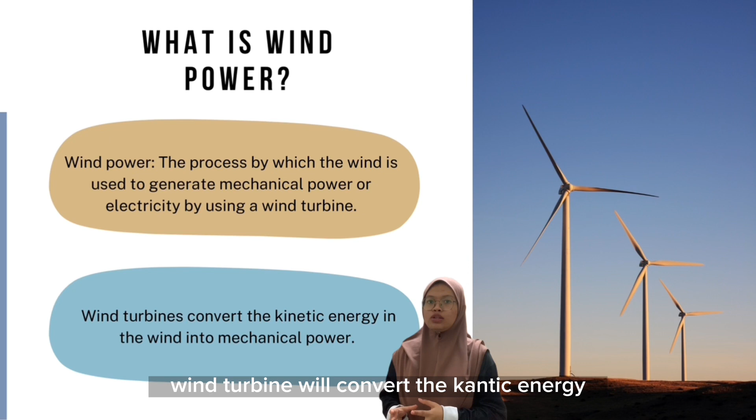Firstly, I will explain about the definition of wind power. What is wind power? Wind power is the process by which wind is used to generate mechanical power or electricity by using a wind turbine. The wind turbine will convert the kinetic energy in the wind into mechanical power.

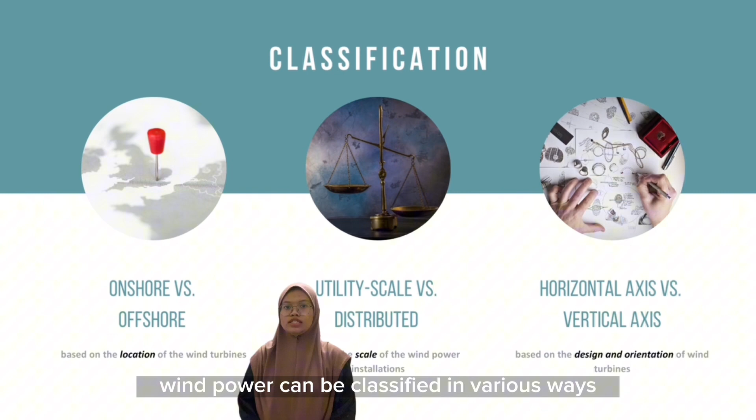Okay, we move to the classification of wind power. Wind power can be classified in various ways based on location, scale, turbine design, capacity, and connection. Understanding this classification helps us better appreciate the diversity and versatility of wind power as a renewable energy.

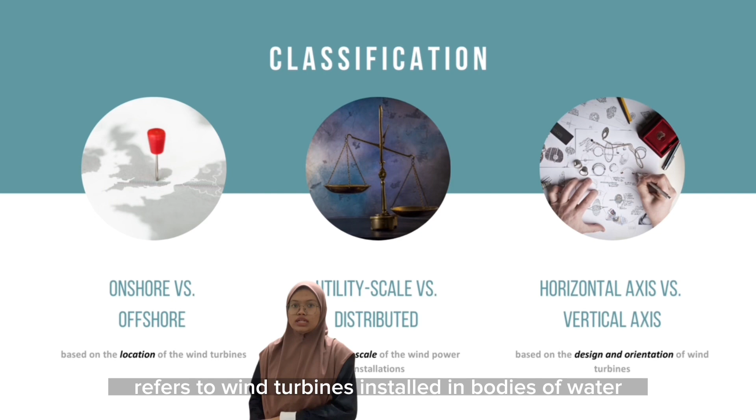The first classification is based on the location of the wind turbines. We have onshore wind power and offshore wind power. Onshore wind power refers to wind turbines installed on land, typically in open areas, hills, or mountains. Offshore wind power, on the other hand, refers to wind turbines installed in bodies of water, usually in coastal areas or in large bodies of water such as lakes or seas.

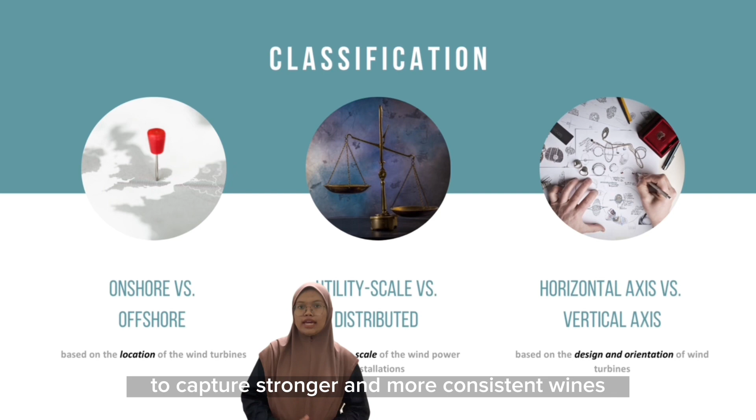Offshore wind farms are often built further out to sea to capture stronger and more consistent winds.

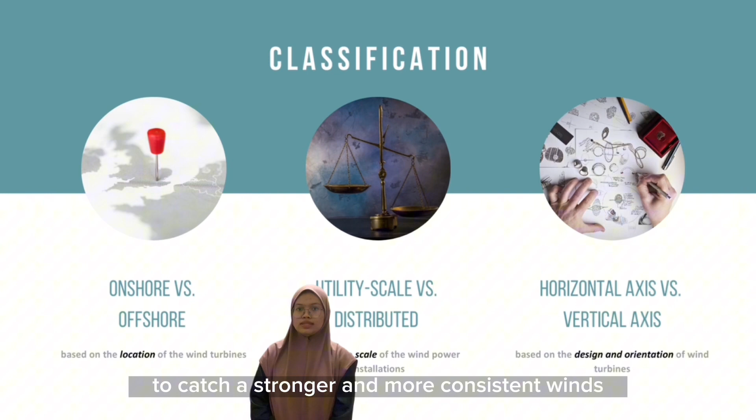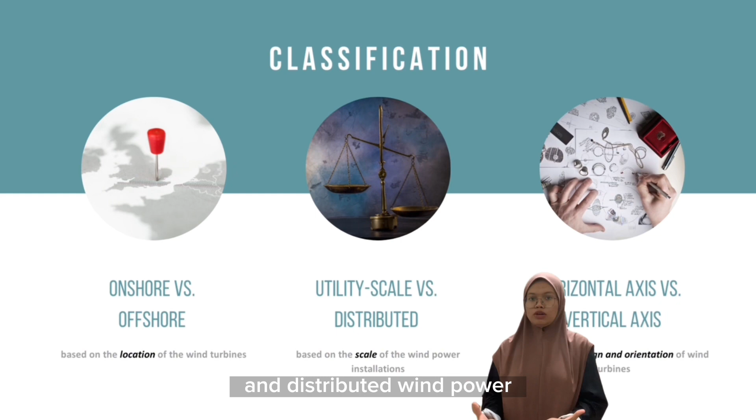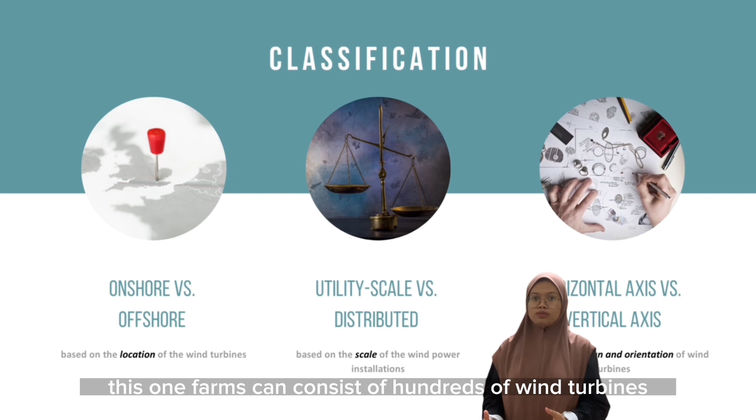The next classification is based on the scale of wind power installations. We have utility scale wind power and distributed wind power. Utility scale wind power typically refers to large wind farms that generate a significant amount of electricity and are connected to the power grid. These wind farms can consist of hundreds of wind turbines and are usually located in areas with high wind potential. On the other hand, distributed wind power refers to smaller wind turbines installed closer to the point of electricity consumption, such as residential, commercial, or industrial buildings. These decentralized systems can provide power directly to the location where it's needed, reducing transmission losses.

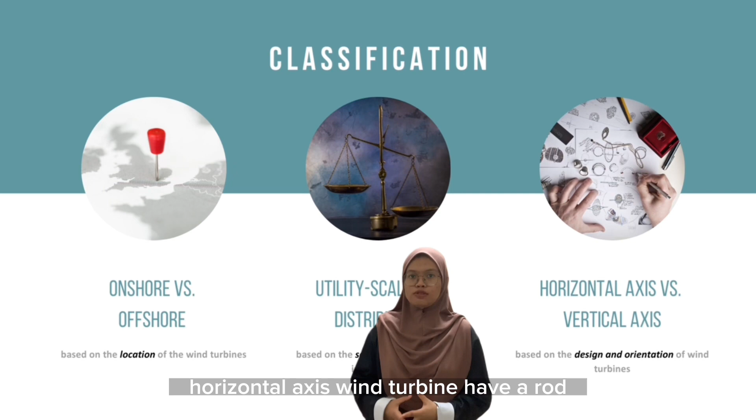Let's now look at the classification based on the design and orientation of wind turbines. We have horizontal axis wind turbines, which is HAWT, and vertical axis wind turbines, which is VAWT. Horizontal axis wind turbines have a rotor shaft that is parallel to the ground, and the blades rotate around a horizontal axis. These are the most common type of wind turbines used for large-scale wind power generation.

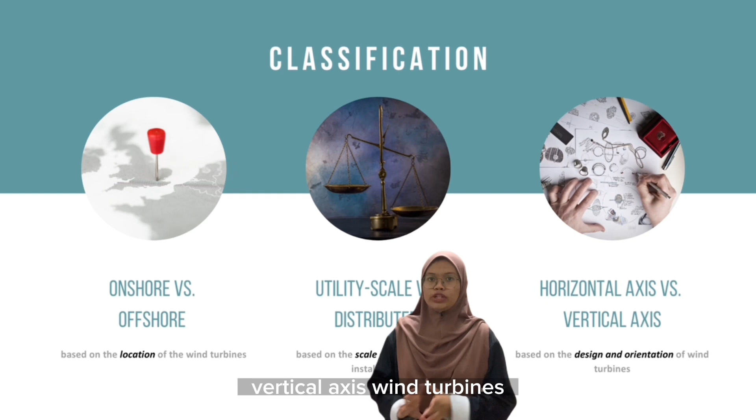Vertical axis wind turbines, on the other hand, have a rotor shaft that is vertical, and the blades rotate around a vertical axis. While less common, VAWTs can be suitable for certain applications such as urban and rooftop installations.

Another classification is based on the capacity or output of wind turbines. We have small-scale wind power and large-scale wind power. Small-scale wind power typically refers to systems with lower capacity, often used for residential or small-scale commercial applications. These systems can provide power to individual homes or businesses. On the other hand, large-scale wind power refers to systems with higher capacity, typically used for utility-scale power generation. Large wind farms with multiple turbines can generate significant amounts of electricity to meet the needs of entire communities or regions.

And the last classification is based on the connection of wind power systems. We have grid-connected wind power and stand-alone wind power. Grid-connected wind power systems are connected to the power grid, allowing for the injection of electricity into the grid and drawing power from the grid when needed. This enables a reliable and continuous supply of electricity.

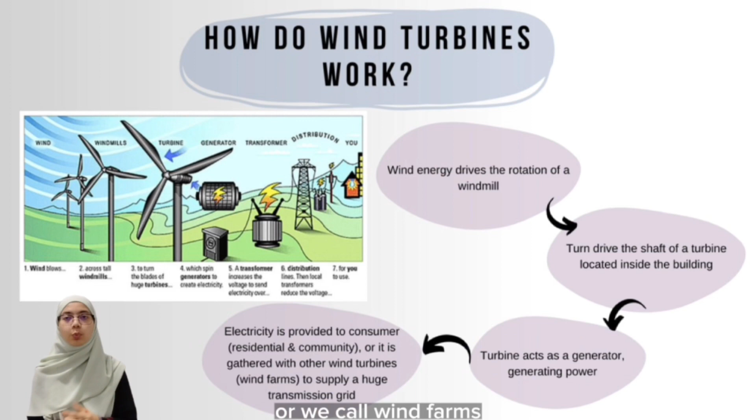Then, when its shaft moves, this turbine acts as a generator, generating power. This electricity is provided to a residential area, a community of consumers, or it is gathered with other wind turbines, which we call wind farms, to supply a huge transmission grid.

Now, let's proceed to the characterizations, properties, and design of wind power.

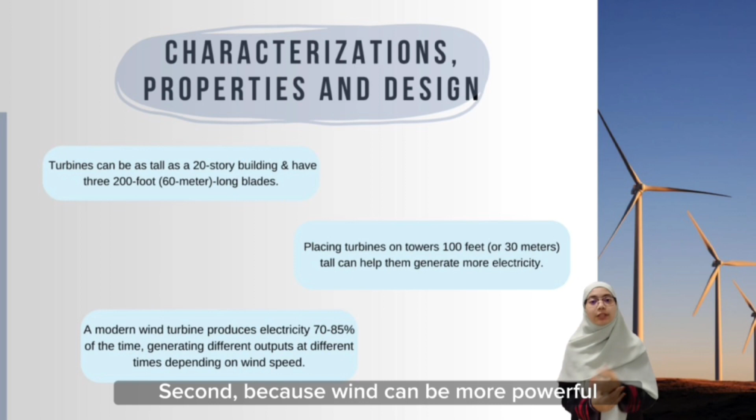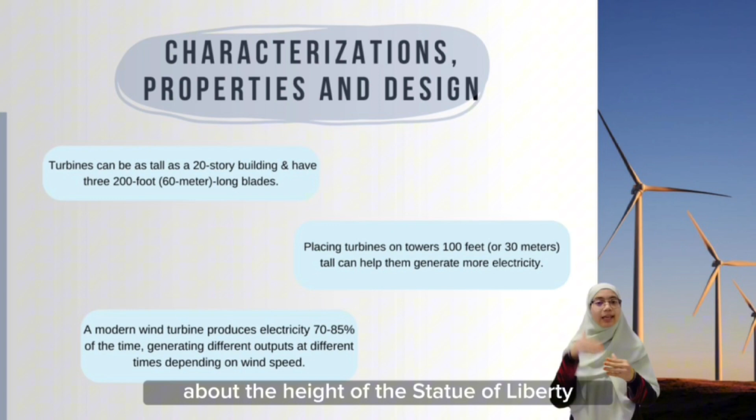Most wind energy comes from turbines that can be as tall as a 20-story building and have three 200-foot or 60-meter long blades. Because wind can be more powerful and less volatile higher in the atmosphere, placing turbines on towers 100 feet or 30 meters tall, about the height of the Statue of Liberty, can help them generate more electricity. A modern wind turbine produces electricity 70 to 85% of the time, generating different outputs at different times depending on wind speed.

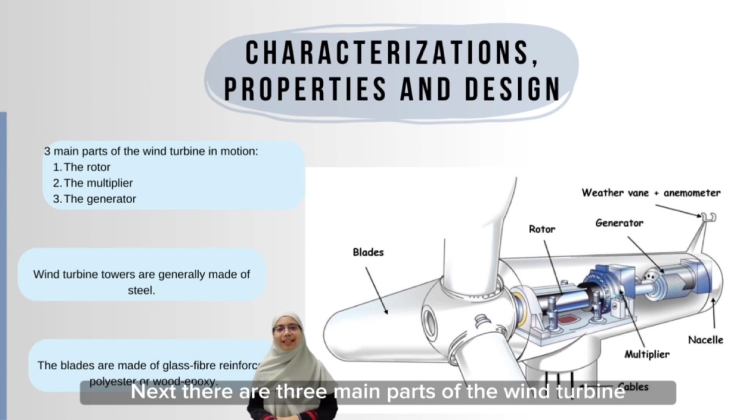There are three main parts of the wind turbine in motion: rotor, multiplier, and generator. The rotor is composed of three blades and the bushing that joins them together. Its function is to capture the force of the wind and convert it into mechanical rotational energy.

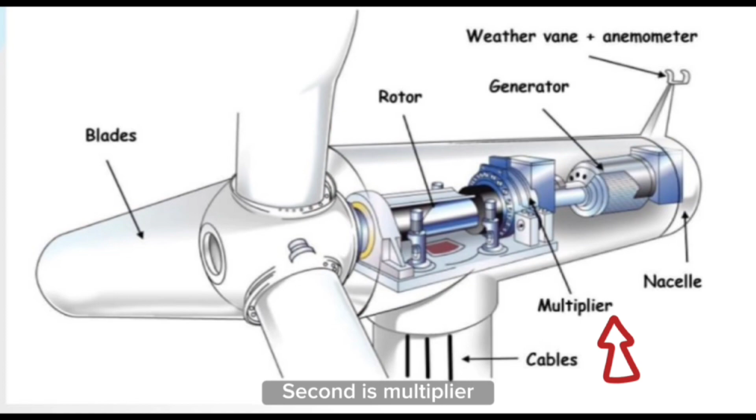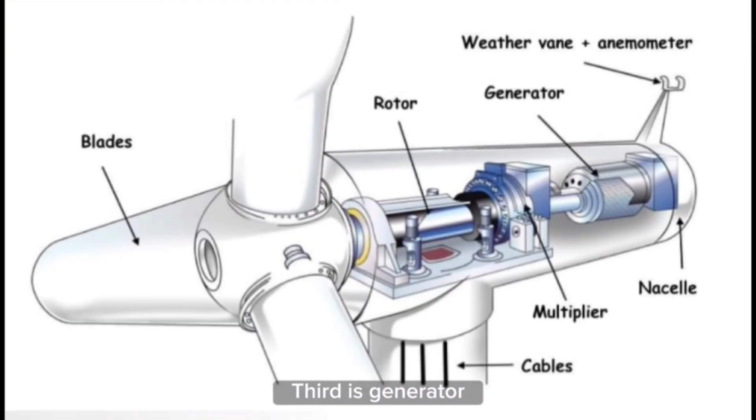The multiplier is connected to the engine by means of a shaft. Its function is to increase the rotational speed from 13 revolutions per minute to 1500 RPM. The generator is responsible for converting the mechanical energy of rotation into electrical energy.

Wind turbine towers are generally made of steel. The blades are made of glass fiber reinforced polyester, or wood epoxy. The finish in most models is made to reduce reflected light.

Let's move to the next slide. Here we have 5 positive environmental effects of wind power.

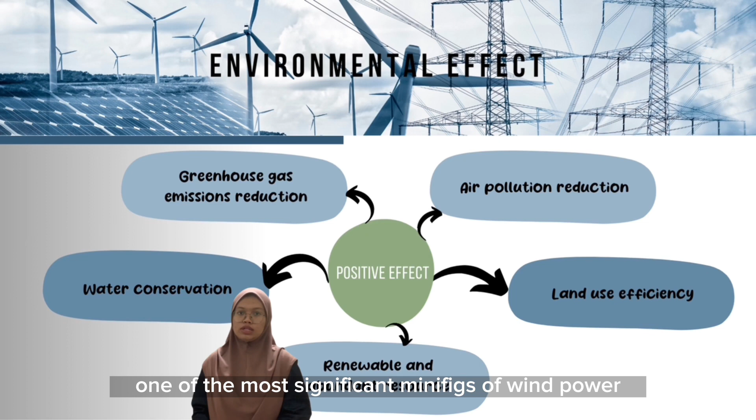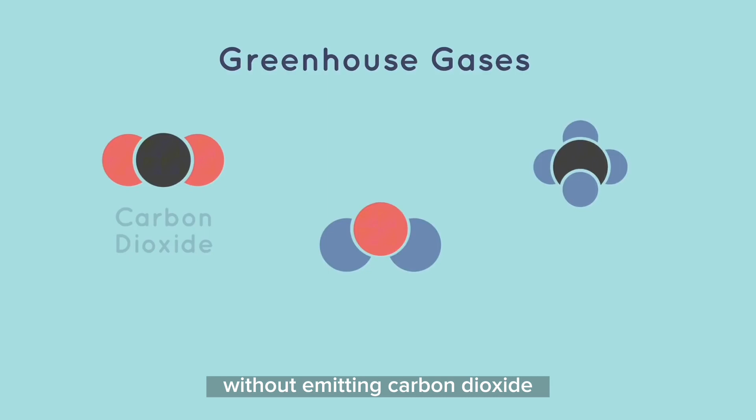One of the most significant benefits of wind power is its contribution to reducing greenhouse gas emissions. Unlike traditional power generation methods, wind turbines generate electricity without emitting carbon dioxide or other harmful greenhouse gases. By harnessing the kinetic energy of the wind, it helps to reduce reliance on fossil fuel-based power generation, which contributes to climate change.

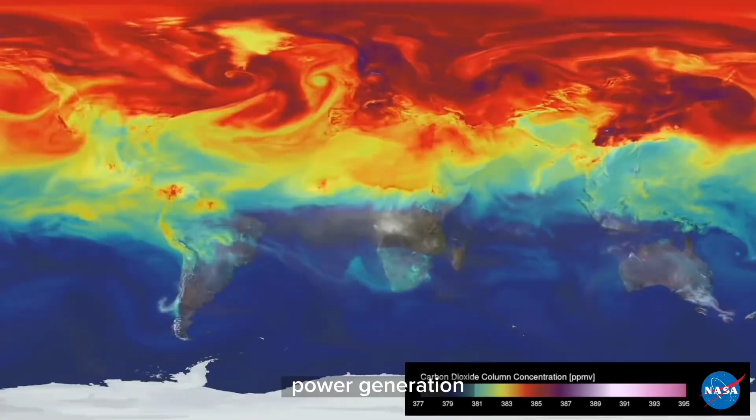Another positive effect is the reduction of air pollution. Conventional power plants, especially those relying on fossil fuels, release pollutants such as sulfur dioxide, nitrogen oxides, and particulate matter into the atmosphere, contributing to poor air quality and adverse health effects. Wind power, on the other hand, produces no such emissions, resulting in cleaner air and healthier communities.

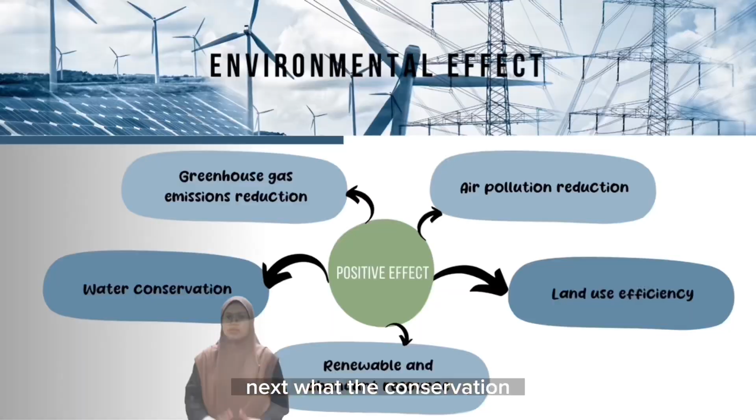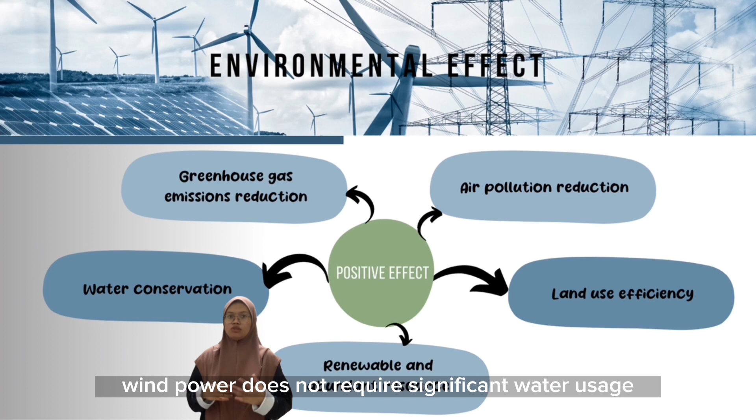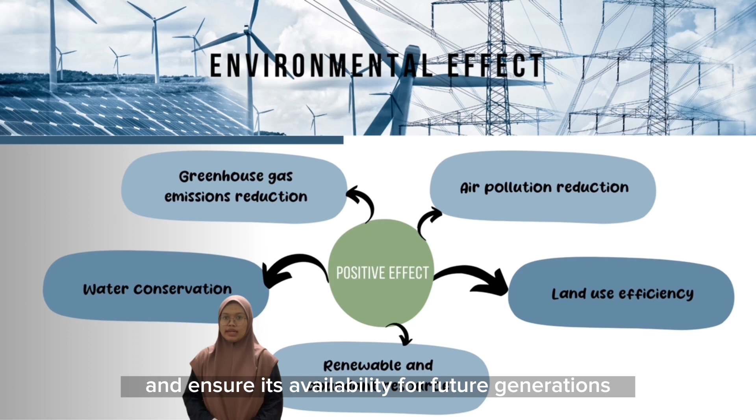Next, water conservation. Water conservation is a pressing concern worldwide. Many traditional power plants consume substantial amounts of water for cooling purposes. In contrast, wind power does not require significant water usage, thus alleviating the strain on this vital resource. By embracing wind energy, we can promote responsible water management and ensure its availability for future generations.

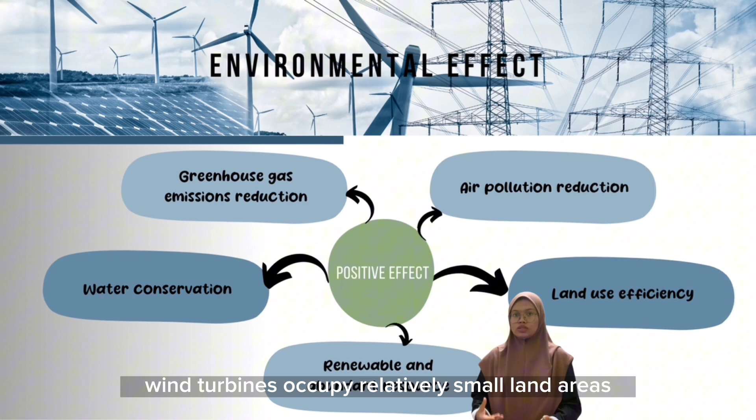Land use efficiency is another good effect of wind power. Wind turbines occupy relatively small land areas, and the land surrounding them can still be used for various purposes such as agriculture or grazing. The dual use of land for wind power and other activities can provide additional economic benefits.

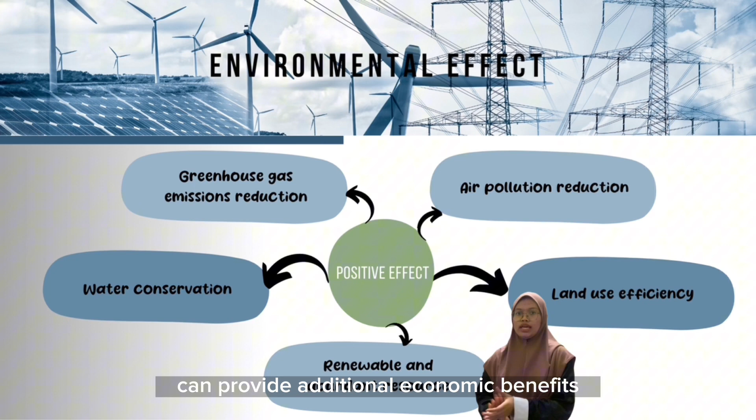Lastly, wind energy is derived from an abundant and renewable resource, which is the wind itself. Unlike finite fossil fuel reserves, wind is an inexhaustible source of energy. By embracing wind power, we diversify our energy mix, reduce our dependence on fossil fuels, and create a more sustainable future.

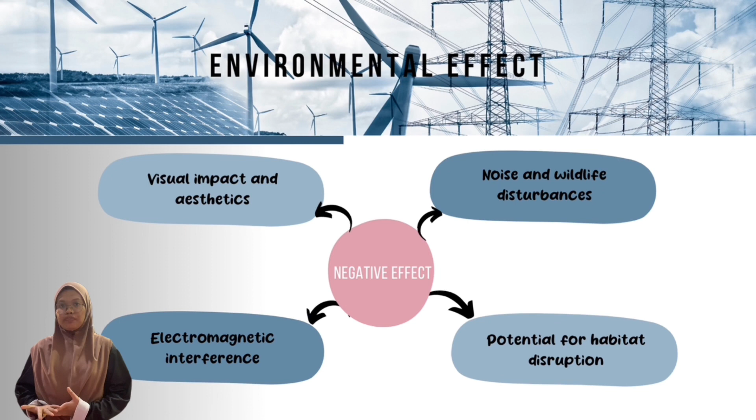Next, we will be discussing another important topic: the negative effects of wind power. While wind power is often praised for its environmental benefits, it's crucial to recognize that it also has some downsides that need careful consideration. Firstly, visual impact and aesthetics.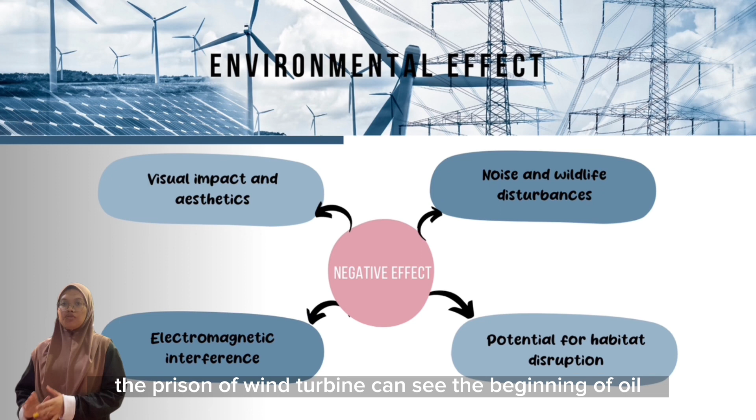One of the primary concerns raised by critics of wind power is its visual impact. Some people find wind turbines visually unappealing, particularly in scenic natural areas. The presence of wind turbines can significantly alter the aesthetics of landscapes, leading to debates and conflict within communities.

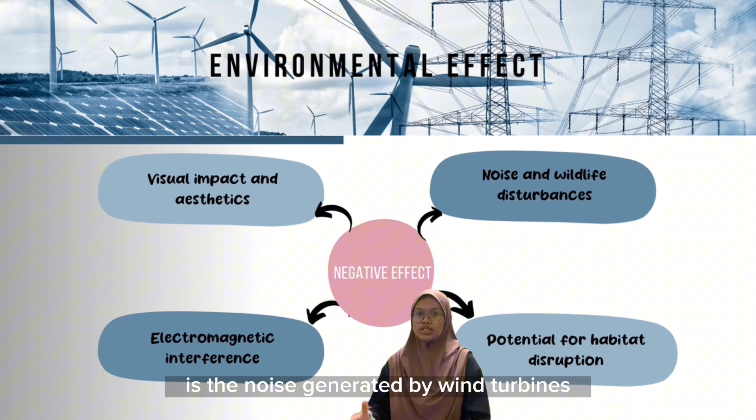Another negative effect is the noise generated by wind turbines. Although modern designs have reduced noise levels, concern still exists, especially for residents living in close proximity to wind farms. Additionally, wind turbines can pose risks to birds and bats. Their rotating blades can collide with flying wildlife, particularly in areas along migration routes or habitats with high wildlife activity.

Habitat disruption is also one of the negative effects. The installation of wind farms may require clearing land or disrupting habitats. This can lead to the loss of vegetation, soil disturbance, and potential impacts on local wildlife populations. Proper planning and environmental assessment are crucial to minimize the disruption of ecosystems and biodiversity.

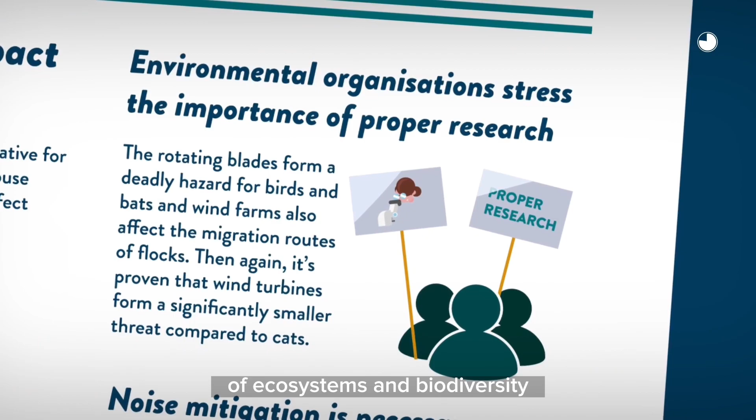Lastly, electromagnetic interference. Wind power requires transmission lines to connect the turbines to the electrical grid. These transmission lines generate electromagnetic fields which can potentially interfere with certain electronic devices or communication systems. Adequate management and precaution are necessary to minimize electromagnetic interference and ensure uninterrupted functioning of nearby technologies.

In conclusion, wind power offers significant advantages and challenges. It diversifies our energy mix, promotes sustainability, and reduces our dependence on finite fossil fuels. It also has the potential to create a sustainable energy landscape that benefits both present and future generations.